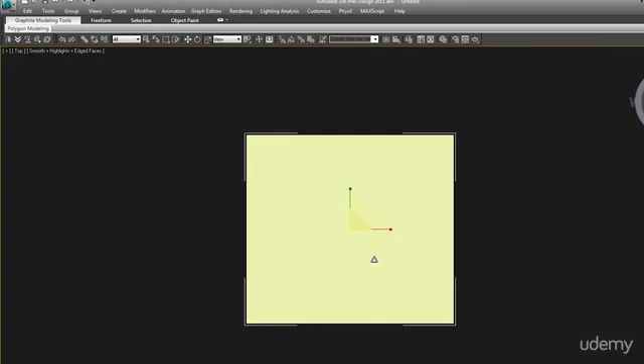Let me show you the difference. We'll start with scale. Again, you have your gizmo here, you select here and it scales in all directions, just like that. Now actually, with the gizmos on, you can scale non-uniformly without even changing it up there. You can see if you just select one of the axes of the gizmo and scale in that direction, it's scaling non-uniformly, meaning it scales more in the Z direction than it does in the other directions.

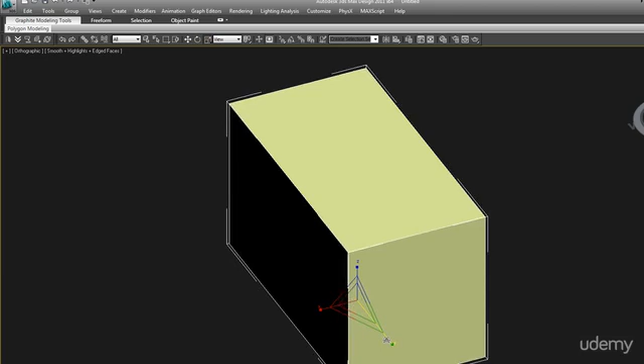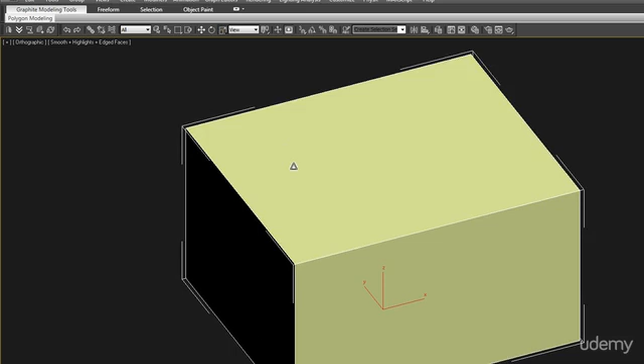And you can do that with all of them. Really this is going to do the same thing now if you didn't have your gizmos on. X, then now non-uniform scale along the X-axis, it's highlighted there. And uniform scale, you can see all the axes are highlighted. Okay, but for now we'll just leave our gizmo on, that makes it easier.

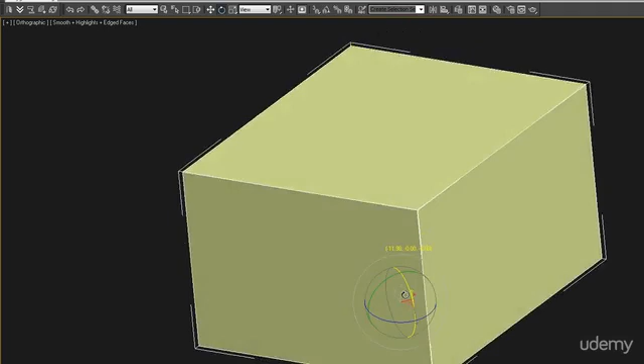Rotate. You can use your gizmo as well. As you can see, there's three axes here, represented by three different colors. The yellow will rotate it around the Z-axis, which is always up in 3D Studio Max. This is rotating it around the X-axis, you can see it highlighted there. And the Y-axis. So now we've gotten a little funky here, let's go back.

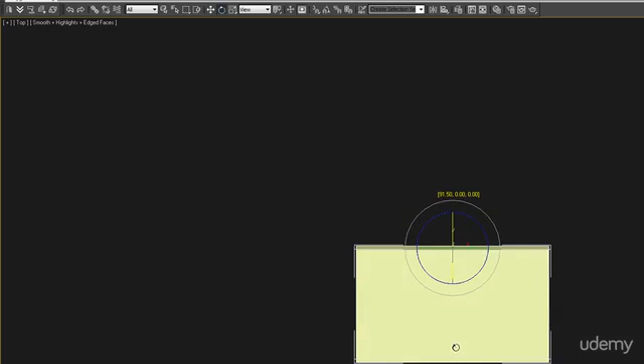Okay, so here in the top view, this will illustrate. So if we want to rotate around the X-axis and put this right up on its side, you can see that the angle of the rotation is showing up right there in that yellow text.

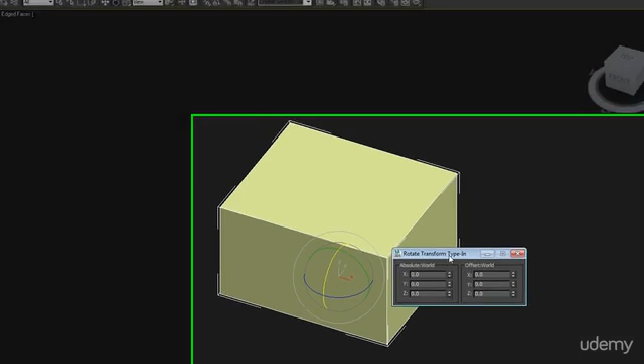A couple other things, we can rotate. We can also right click and bring up our quad menus here and hit on rotate and hit this little box here, and whenever you see a box like that, that means you can bring up options like this. And here you can rotate with a type-in number, so rotate at 90 degrees along the X-axis.

Boom, there you go. 90 around the Z, there you go. And of course, move and scale have the same thing. Move. Okay, so all three axes are there.

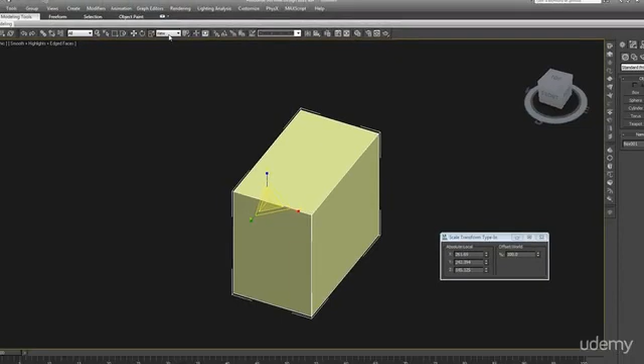When you scale, if it's set up here to uniform scale, then you just have a percentage like that. If it's non-uniform scale, then you have three axes and each one can be scaled differently. So if you need exact numbers, you can go there.

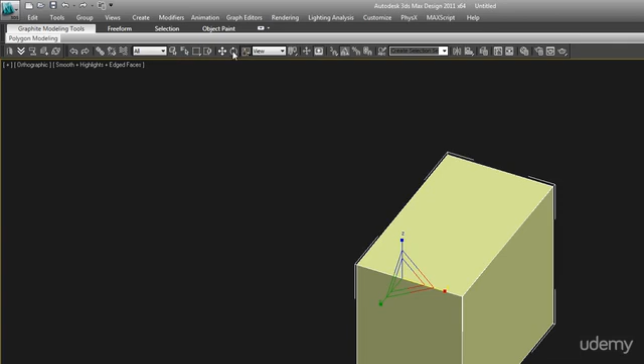Another thing to keep in mind is here, angle snap toggle. Here's our snap 2, which we haven't talked about yet. But let's talk about this angle snap toggle. So if that's on, when we rotate, the angles are pretty small, but we're actually snapping to certain angles.

If you look at the numbers down here, these also show what you're doing as far as transforms go. You'll see that we're going from 90 to 5, 10, so every 5, it's snapping to every 5 degrees only. If you want to go in smaller increments than that, you need to have that turned off. But if you want exact numbers and don't want to carefully get it right to that exact number, you can turn on the snap.

Or you can always just type it in here too, 95, and you can set exact rotation angles. Like right now, this is rotated at 90 degrees in the Z angle, and it's always going off of how you first created it.

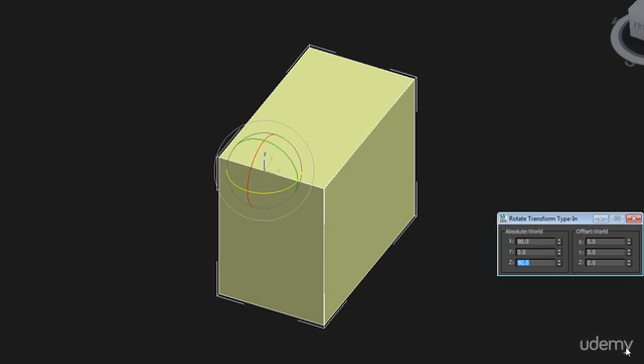So it's 90 degrees from where we first created it. Let's make it 30 degrees, so that's kind of an absolute number, that puts it at 30 degrees. The X will put it back to 0, just like we created it. And these are offsets. So it's at 30 degrees right now, but we want to add 5 more degrees to it, just like that. So that offsets it 5 degrees from where it was, so now it's 35 degrees. That's the difference between absolute world and the offset world.

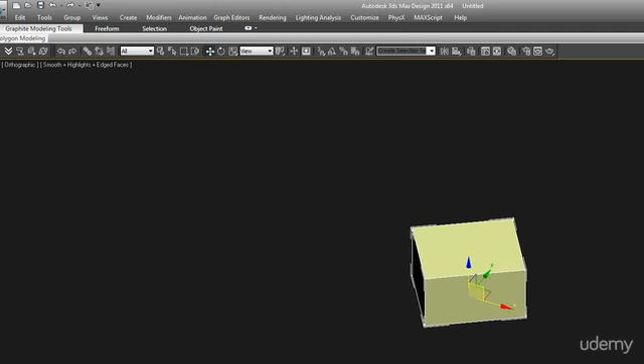Okay, and move is pretty self-explanatory. You can move it in any axis, just like this. Only in those two axes. And that's kind of demonstrating how that gizmo works a little bit.

Now let's put this back to 0 degrees rotation, so we're straight.

Now let's talk about hotkeys real quick. We'll use move, rotate, and scale all the time, so for me, I set up hotkeys for those. Move is Q, rotate is A, and scale is Z. You'll notice that's for your left hand on the keyboard, the furthest to the left you can get with those 3 letters. Very accessible by your left hand, not on the mouse, so you can hit them quickly and easily. I'd recommend doing something like that, really easy to hit whenever you want, because you'll use those regularly.

Okay, the last thing we're going to talk about is copying. All you do for that is move something, rotate it, or do any transform on it while holding down Shift. So let's try that. Shift and move along the x-axis, and it brings up these options, the clone options. It's called cloning.

Here I really only ever use the first 2. Copy and instance are the 2 important ones for me. Copy just means that it makes a copy of it. Instance means that those 2 objects are still linked together, and I'll show you how.

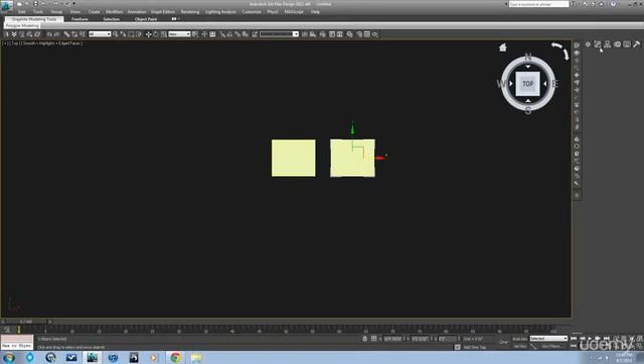So if we make this an instance like this, and then we put, say, some sort of modifier on it, we'll show you that FFD modifier again, and you can see that already the FFD showed up on both of these. So essentially anything you do to one instance, it will do to any other objects that are instanced to that same object. So instances remain tied together, and they always do the same thing.

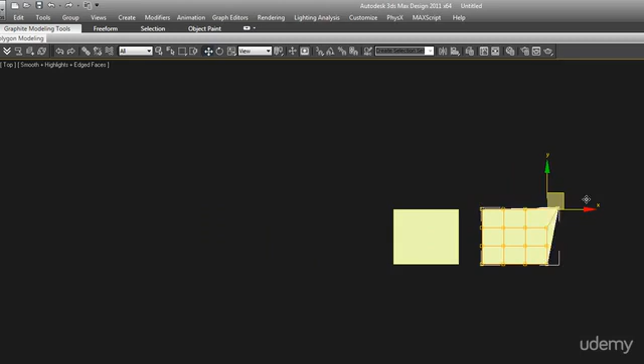You can see that there. Now if those were just copies, that wouldn't happen. I'll demonstrate that real quick. There's actually a button here to break the instance, called the Make Unique button. So that is now just essentially a copy of this first box. Now if I do something on it, it's no longer instanced to that other box, so it will be unique, and this box won't copy what it's doing.

It's important to keep your copies and your instances straight, especially when you have, for example, a can light or some sort of light in your architectural project and you have 200 of them. You don't want to go back in and adjust each one individually if you realize they're too dark or too bright. So make sure the lights are instances, change it one time if they're all the same kind of light, and it updates all of them.

If you have any objects in your scene that are going to be used over and over again, I'd recommend instancing them. If you have something similar to something else in your scene, but you're going to want to modify it, make sure to copy it so those modifications only happen to your new object and not the old one. That can screw you up sometimes, so try to keep those straight. It'll speed up your workflow quite a bit if you get good at deciding whether to use copies or instances.

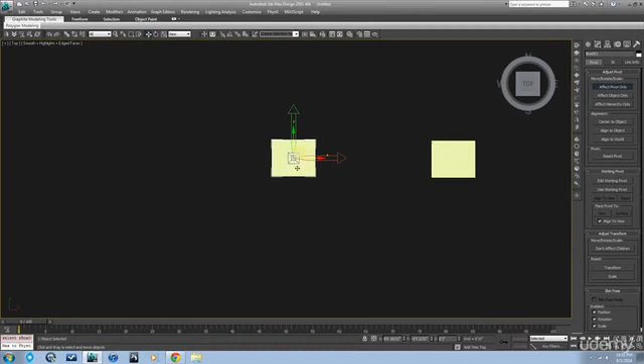One more thing about rotating before we end this video. Let's show one other important aspect. You can see this gizmo is always right here in the center of this box, and that's because that's where the pivot of that box is. If you go into, okay, so there's create, there's modify, and here's hierarchy. If you hit this button, pivot, it shows the pivot of that box. So for example, if you rotate that box, it's going to rotate around... oh, that's funky, okay, we don't want that on yet. So it's going to rotate around that pivot. That pivot, when you created the box, is essentially put right at the center of the box. But you can change that, and I'll show you why you'd want to do that.

If you hit this, affect pivot only, it shows you the pivot, and then you can move that pivot just like that. So let's just move it down here real quick. Turn off affect pivot only. So now that box is pivoting way down there. So if we go into rotate and rotate it now, it's going to rotate still around that pivot.

So say we wanted a bunch of these boxes in a circle, you could do this. Hold down shift, rotate, and it's going to rotate around that pivot. We'll say we want number of copies - well, we select instance, number of copies, really number of instances here. We'll say 9, and you see what that does.

Now we won't go too much in depth right now about this up here, but use pivot point center. So for your transformations, if you want to do what I was just doing, you want to make sure you're on use pivot point center. That means it's going to rotate around that pivot like I said.